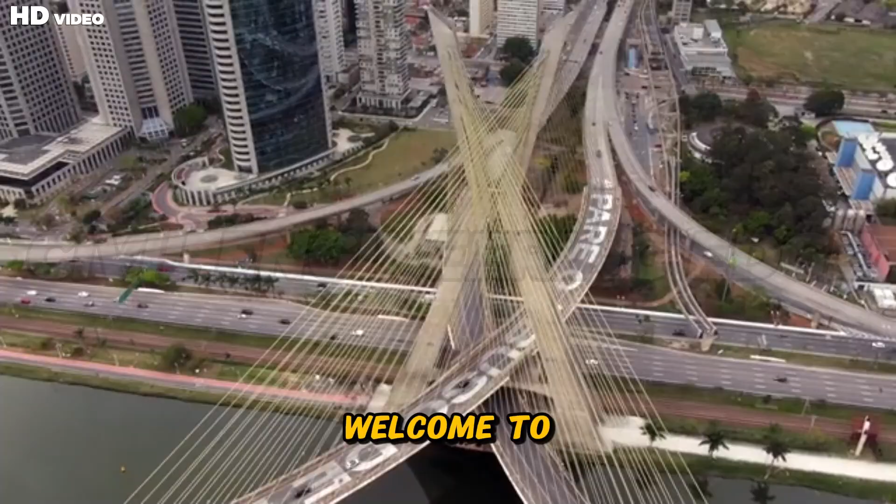In today's video, we're diving into one of the most astonishing possibilities of future urban development: mega underground cities. Imagine entire districts—homes, transport hubs, industries, farms—all built beneath the Earth's surface. Why are engineers exploring downward instead of upward? What technologies make this possible? And could underground cities become humanity's next great frontier? Stay tuned as we break down the engineering, the challenges, the innovations, and the future of living below ground.

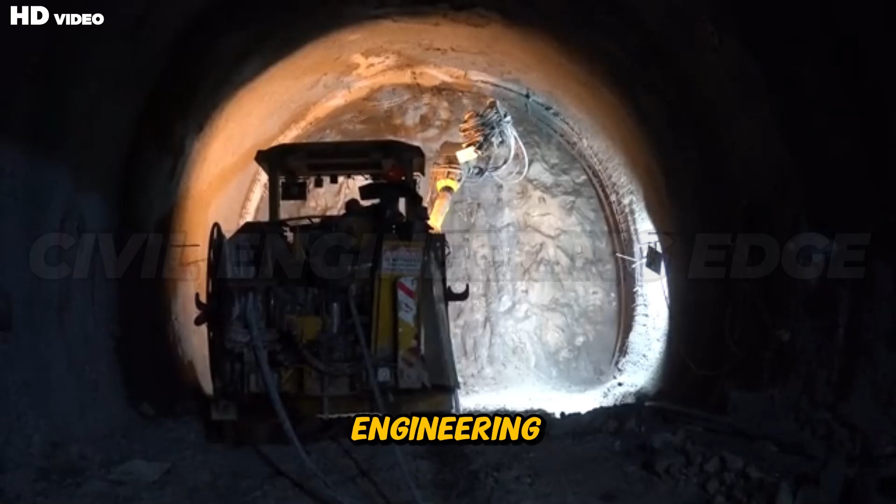Let's begin. Imagine a city, not sprawling across land, but burrowing deep beneath it. What if our future isn't in skyscrapers, but in subterranean megadevelopments? Get ready to dive into the astonishing engineering and surprising technologies making these underworld cities a very real possibility. The intricate planning and construction of massive underground urban developments is explored, along with the surprising technologies and engineering feats required to create subterranean metropolises.

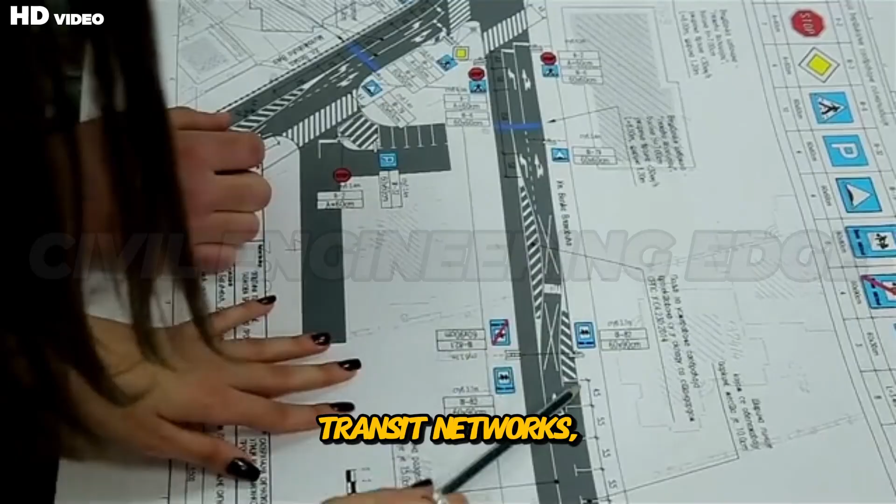The subterranean allure: why go underground? As cities grow denser and land becomes scarce, engineers and planners are forced to rethink the very idea of urban expansion. Instead of competing for limited surface space, visionary thinkers are now looking downward toward the vast, untapped world beneath our feet. The concept of constructing entire districts, transit networks, and public facilities underground isn't just science fiction. It's becoming an urgent solution to modern challenges, from mitigating climate extremes to protecting populations from natural disasters.

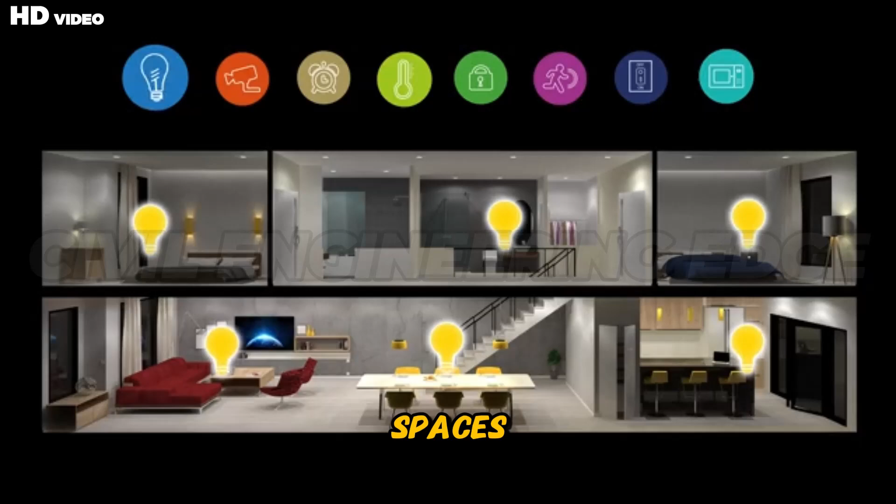Subterranean development offers safety, sustainability, and long-term resilience. Underground spaces have stable temperatures, reduced exposure to environmental hazards, and immense potential for innovative design. With advanced excavation technology and groundbreaking materials, the once impossible idea of underground cities is fast evolving into a practical engineering frontier. This section explores why the future of urban life may not rise into the sky, but instead descend into intelligently designed, climate-shielded environments deep below the surface.

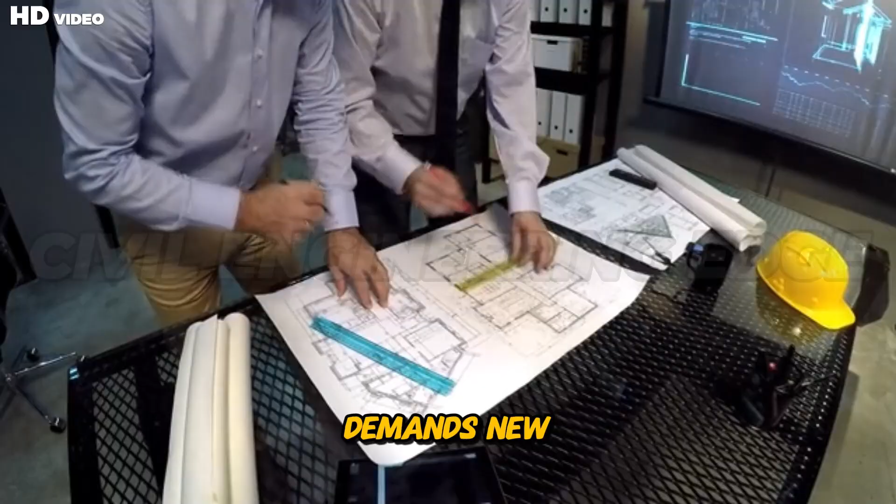The pressing realities of surface overpopulation and extreme climate events are pushing humanity underground. Rapid population growth has pushed major cities into a crisis of space, affordability, and sustainability. Urban areas, especially megacities, are running out of buildable land, forcing millions of people into congested neighborhoods where housing density and infrastructure stress have reached dangerous highs. This growing surface-level pressure demands new solutions, and engineers are increasingly considering the underground realm as a viable alternative. The ground below provides enormous, underutilized volumes that can be transformed into safe, climate-resilient habitats.

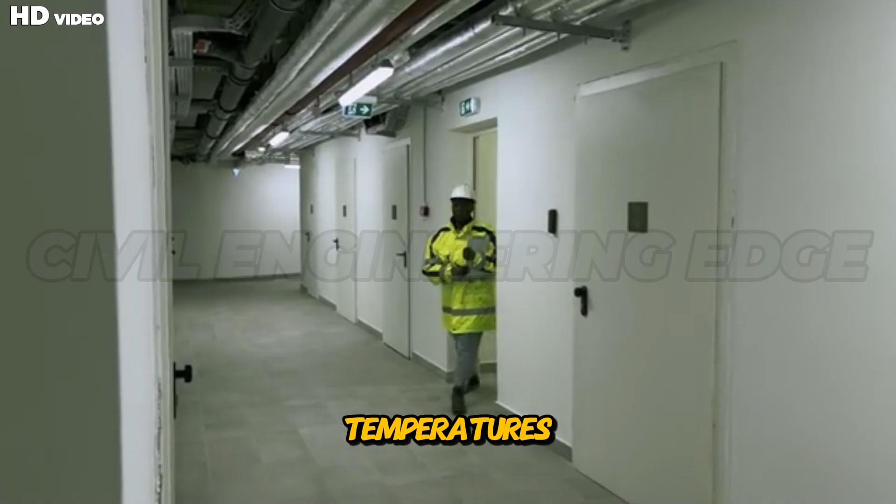In addition to overpopulation, extreme climate events are accelerating the need for such alternatives. Rising temperatures, stronger hurricanes, relentless heat waves, droughts, wildfires, and severe flooding are making many surface environments increasingly hostile. Coastal cities face chronic inundation risks as sea levels rise, while inland cities struggle with heat islands and water scarcity. Underground spaces, naturally insulated from weather fluctuations, offer stable temperatures year-round and protection from storm surges, wildfires, and thermal extremes.

By relocating essential facilities, transit hubs, storage systems, and even residential zones beneath the surface, cities can safeguard populations from environmental instability. Moreover, underground development reduces the pressure on existing land resources, preserving green areas and enabling more sustainable city planning. For nations facing both rapid urbanization and climate threats, subterranean urban expansion represents not just a futuristic concept, but a practical necessity. As climate risks intensify, the underground is becoming humanity's most reliable refuge, a strategic response that combines engineering innovation with climate adaptation to protect future generations.

Historical precedents, from ancient cave dwellings to modern bomb shelters, showcase our primal instinct for subterranean refuge. Humanity's fascination with underground living isn't new. From prehistoric times, people have sought shelter in caves to escape extreme weather, predators, and conflict. These natural formations provided stable temperatures, security, and a sense of protection that open landscapes could not offer.

Ancient underground settlements, such as Derinkuyu in Turkey, a vast multi-level city carved entirely below ground, reveal the remarkable ingenuity of early civilizations. These subterranean labyrinths housed thousands of people, complete with ventilation shafts, storage rooms, water wells, and communal spaces. They served as strategic refuges during invasions and environmental hardships. In China, millions lived in yaodongs, earth-sheltered cave homes valued for their thermal comfort and energy efficiency.

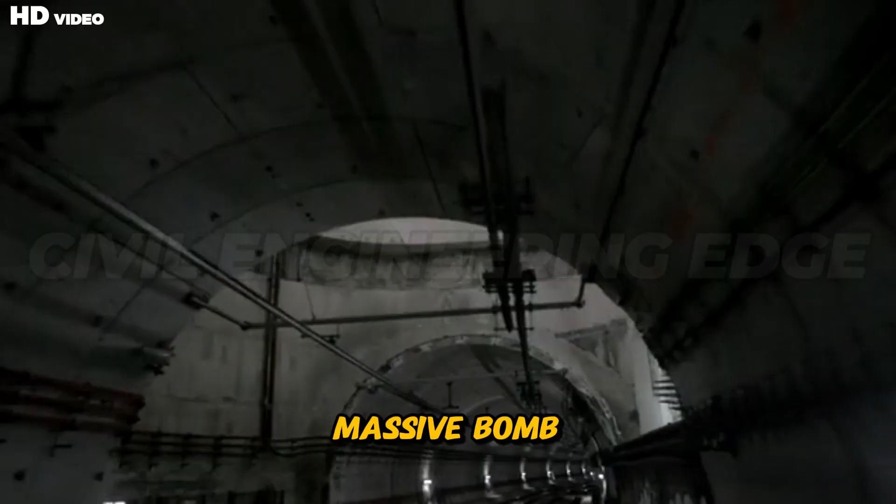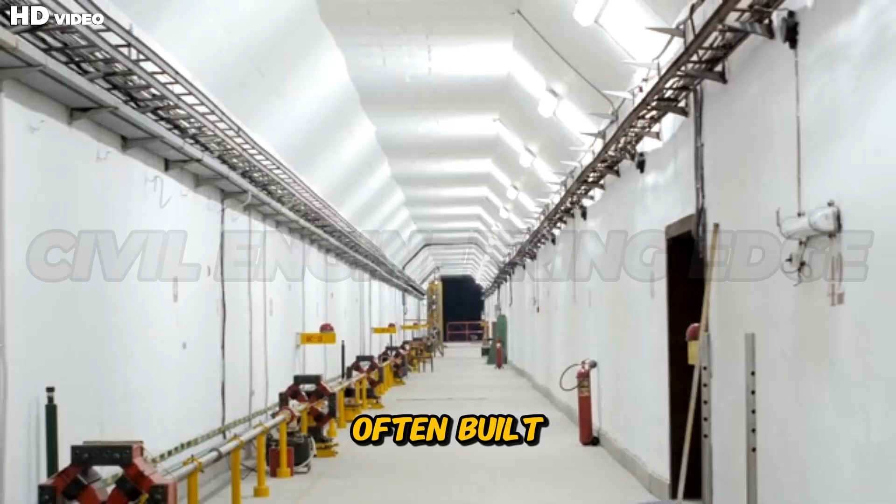Fast forward to the 20th century, and underground spaces took on new significance during wartime. Massive bomb shelters, metro tunnels, and underground bunkers were constructed to protect civilians from aerial attacks. Cities like London, Moscow, and Berlin relied heavily on subterranean networks as safe havens during conflict. Throughout history, this recurring return to the underground reflects a deep-rooted instinct: the need for safety, stability, and survival. Even in modern times, data centers, military bases, research facilities, and archives are often built underground for enhanced security and climate control.

These historical precedents demonstrate that humans have always understood the protective advantages of subterranean environments. Today's push toward underground megacities builds on this ancient legacy, combining timeless principles of refuge with cutting-edge engineering to create sophisticated, resilient urban spaces, teasing the extraordinary benefits and unseen potential of living beneath our feet.

Underground living unlocks a world of possibilities that go far beyond simply creating more space. Beneath the surface lies an environment with unique characteristics that can be engineered into extraordinary advantages for future cities.

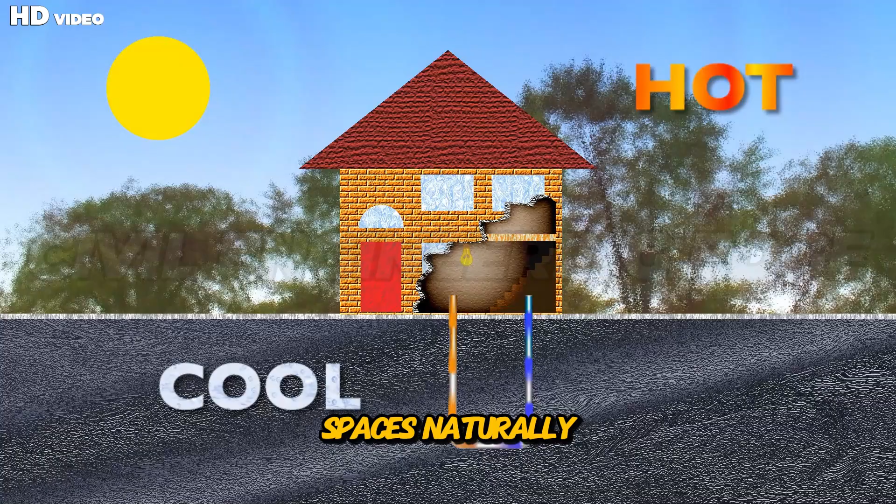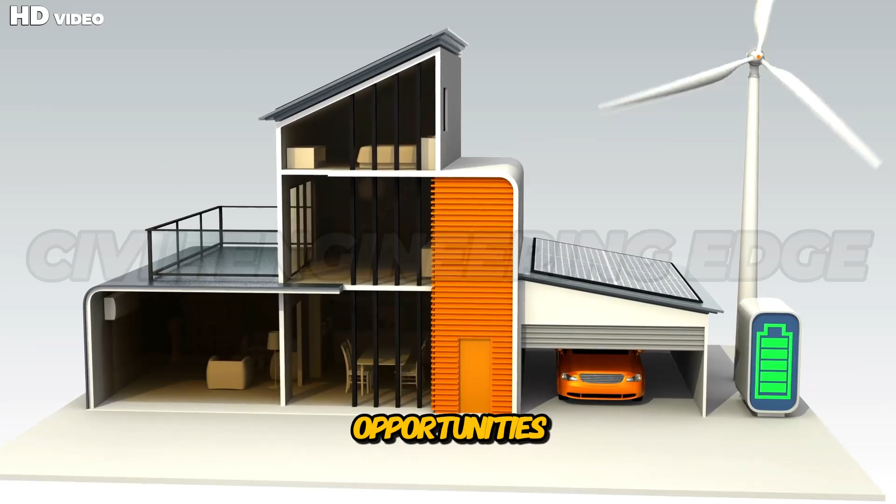Temperature stability is one of the biggest benefits. Underground spaces naturally maintain cooler conditions in summer and warmer conditions in winter, significantly reducing energy consumption for heating and cooling. This creates opportunities for ultra-efficient buildings and eco-friendly infrastructure.

Subterranean cities also shield residents from noise pollution, air pollution, and extreme weather events, offering unparalleled environmental control. Deep below the surface, designers can craft immersive, human-centric environments using smart lighting systems that simulate daylight, natural landscapes, and relaxing ambiences. The underground also presents massive potential for expanding transportation networks without disrupting surface life.

High-speed tunnels, automated logistics corridors, and multi-level transit hubs can operate seamlessly beneath bustling cities. Sustainable resource loops such as underground hydroponic farms, advanced water recycling facilities, and waste-to-energy systems can create self-sustaining ecosystems that operate independently from surface limitations.

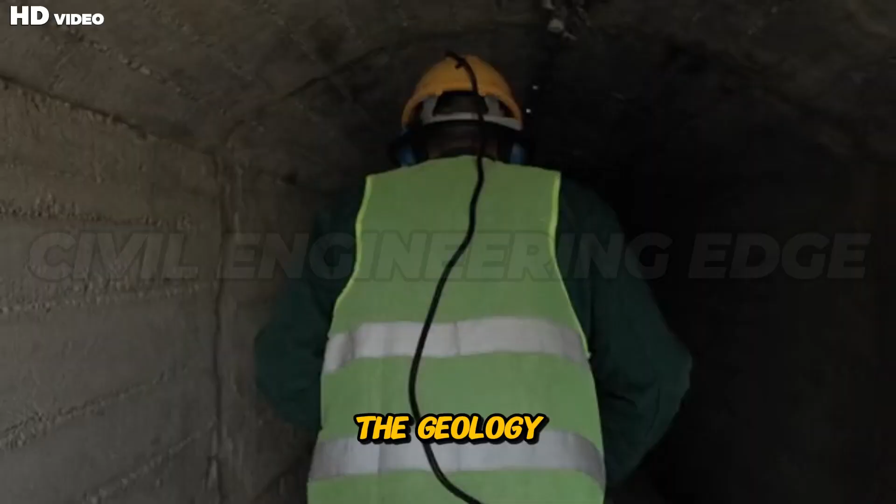The geology of underground spaces also provides exceptional protection for sensitive installations like data centers, laboratories, and emergency shelters. As technology continues to advance, the unseen potential of subterranean development becomes increasingly clear. These environments can become quieter, greener, safer, and more efficient than many surface cities.

The future underground city isn't just a backup plan, it's a bold opportunity to reimagine urban life with innovation, resilience, and sustainability at its core.

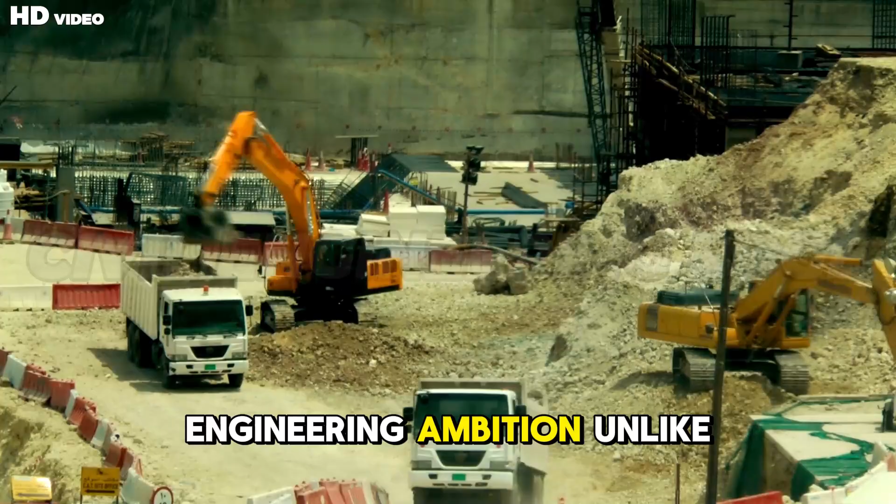Unearthing the impossible, mega engineering challenges. Building massive underground cities is an engineering ambition unlike anything humanity has attempted before. While surface construction deals with open space and accessible terrain, subterranean development demands confronting the Earth itself, creating vast caverns, multi-level transit systems, and habitable districts deep underground requires overcoming extraordinary technical, geological, and human-centered challenges.

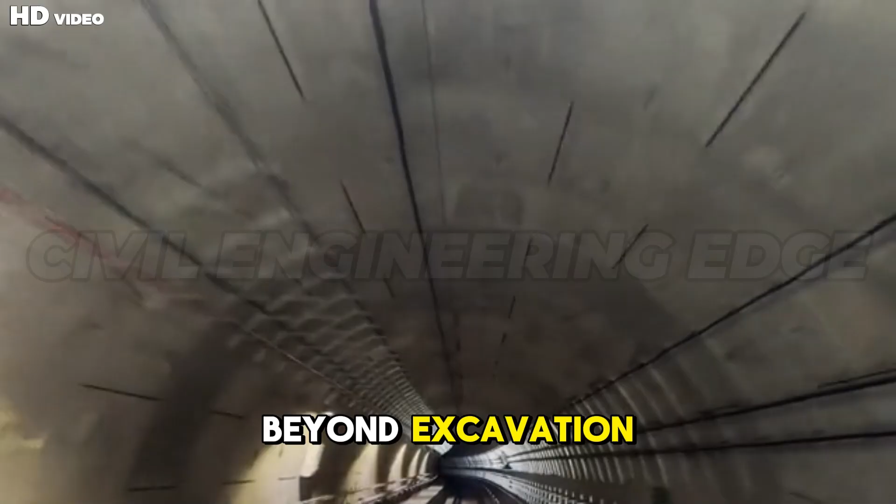Engineers must work with limited visibility, high ground pressure, unpredictable rock formations, and groundwater intrusion, all while ensuring structural safety for thousands of residents. Beyond excavation, designers must account for ventilation, emergency access, fire safety, waste removal, and long-term maintenance in a closed environment. The psychological comfort of people living underground also becomes a critical factor.

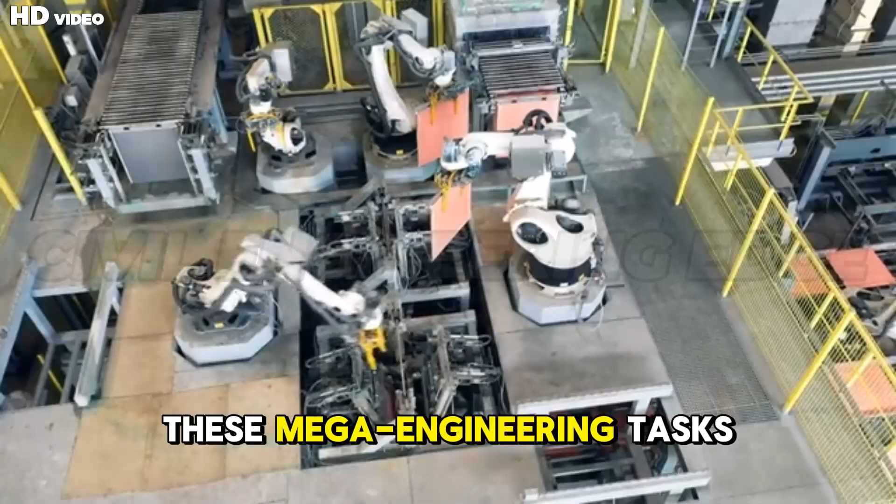These mega-engineering tasks push current technologies to their limit, inspiring new innovations in drilling, reinforcement materials, and automated construction. This section explores the monumental hurdles faced by engineers and the cutting-edge solutions that make these underground dreams plausible.

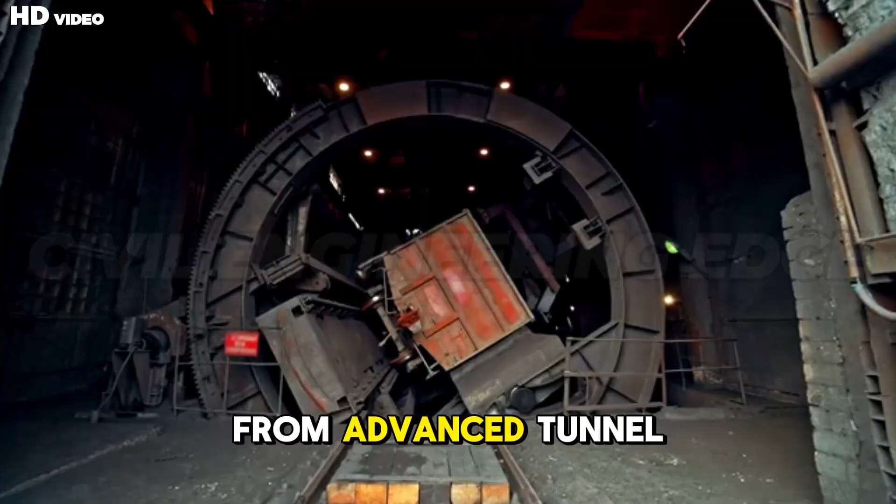The colossal task of excavation. From advanced tunnel boring machines to innovative rock melting technologies, excavating the enormous spaces required for underground cities is one of the most daunting engineering tasks imaginable. Traditional methods like drilling and blasting are too slow, disruptive, and imprecise for creating large, interconnected subterranean districts.

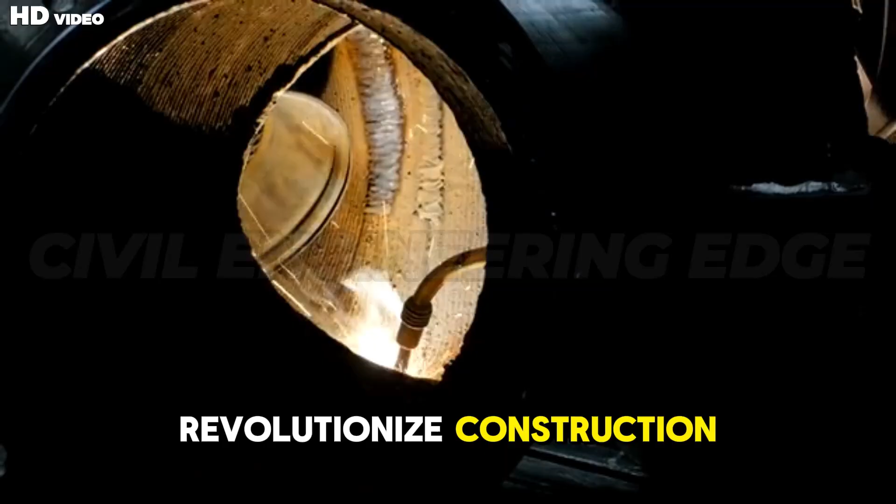This is where modern tunnel boring machines, TBMs, revolutionize construction. These massive mechanical giants, sometimes hundreds of meters long, can cut through rock with remarkable precision, while simultaneously installing tunnel linings to stabilize the excavation. TBMs reduce surface disruption, increase safety, and enable continuous, high-speed tunneling.

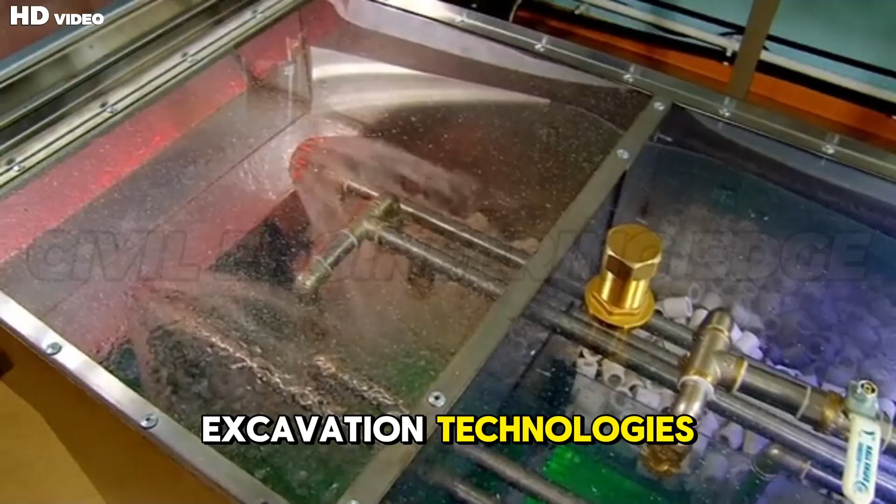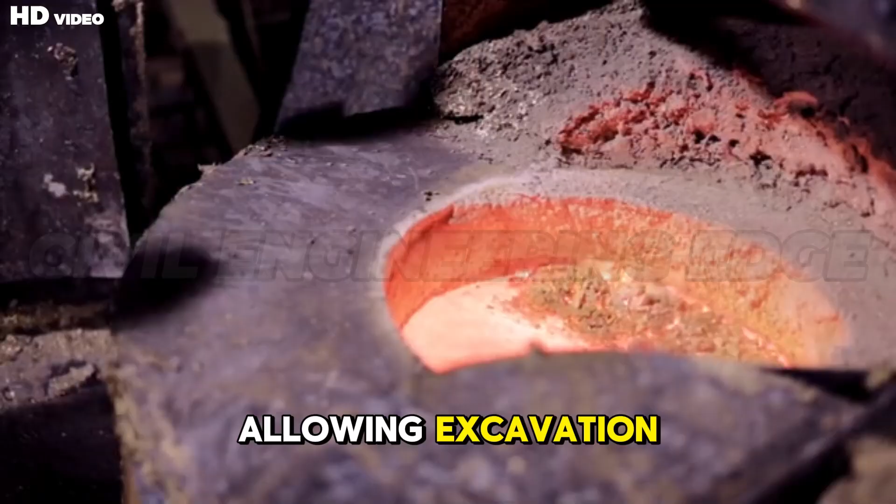However, even TBMs face limitations when dealing with extremely hard rock, mixed ground conditions, or the need for massive cavern formations rather than simple tunnels. To overcome these challenges, researchers are exploring futuristic excavation technologies such as plasma drilling and microwave rock melting systems. These emerging methods aim to soften or liquefy rock using intense heat, allowing excavation without contact-based cutting tools. This could dramatically accelerate construction while minimizing tool wear and geological disturbance.

Other innovations include robotic mining systems, autonomous drilling rigs, and AI-powered geotechnical mapping that predicts rock behavior in real time. Engineers are also experimenting with using controlled chemical expansion agents, 3D rock fracturing patterns, and advanced hydraulic cutters for shaping enormous caverns with high precision.

As underground developments expand in scale, excavation will continue to evolve into a blend of mechanical, thermal, and digital technologies working together. The future of subterranean construction depends on mastering these groundbreaking excavation methods, pushing the boundaries of what is possible beneath the Earth's surface.

Mitigating geological risks, seismic activity, water infiltration, and the stability of massive cavernous structures. Building large-scale underground spaces requires an intimate understanding of geology, since the Earth itself becomes the structural envelope of the city. Geological risks, such as seismic activity, pose significant challenges.

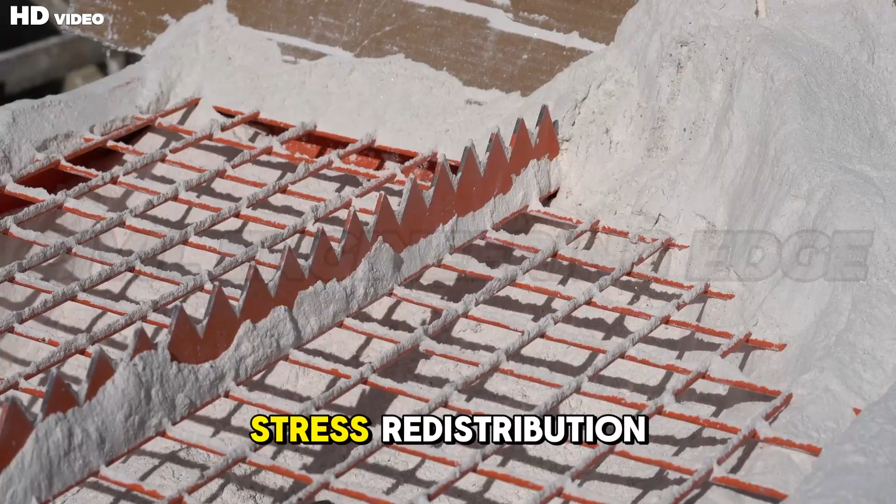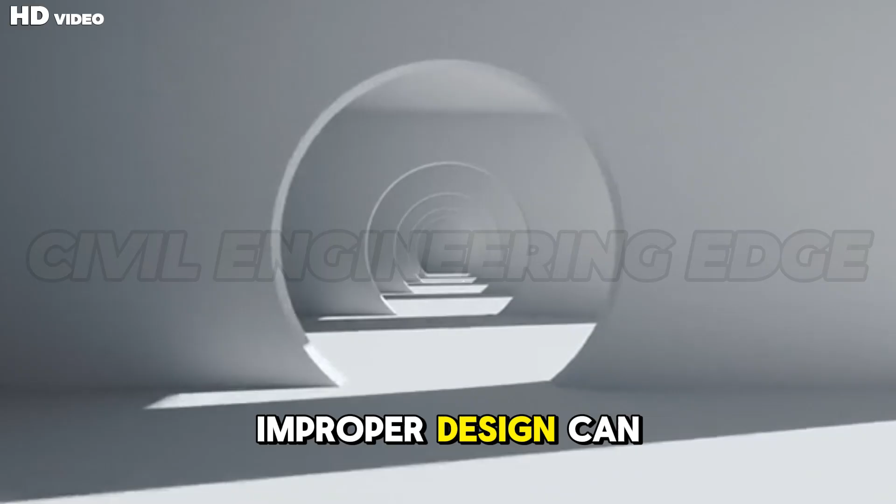Underground structures must be engineered to withstand ground shaking, stress redistribution, and potential rock fracturing. Although underground environments naturally experience lower seismic forces compared to surface buildings, improper design can still lead to collapses or tunnel deformation. Engineers address this by using flexible joint systems, shock-absorbing linings, and real-time monitoring instruments embedded in the rock.

Water infiltration is another major risk. Groundwater can seep into tunnels, increase soil pressure, or cause flooding if not carefully controlled.

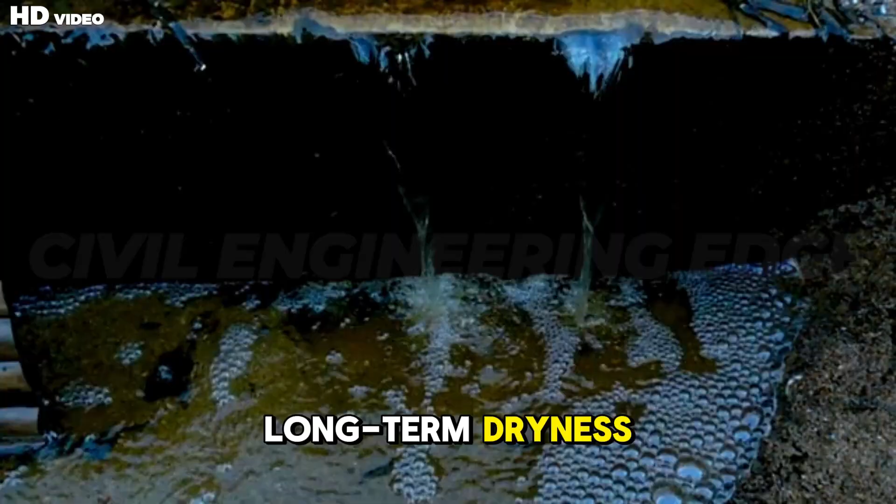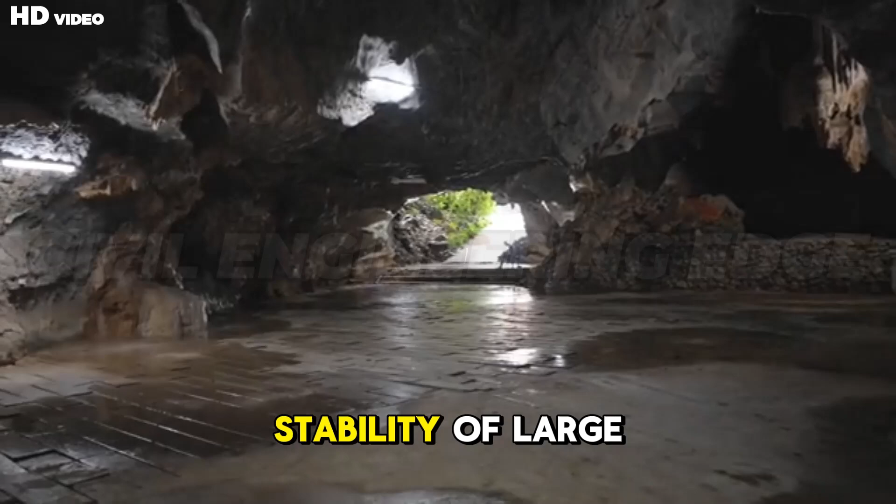Stability of large caverns presents its own set of difficulties. The bigger the open space, the more stress concentrates around its boundaries.

Engineers rely on rock bolts, reinforced linings, steel ribs, and fiber-reinforced shotcrete to maintain structural integrity.

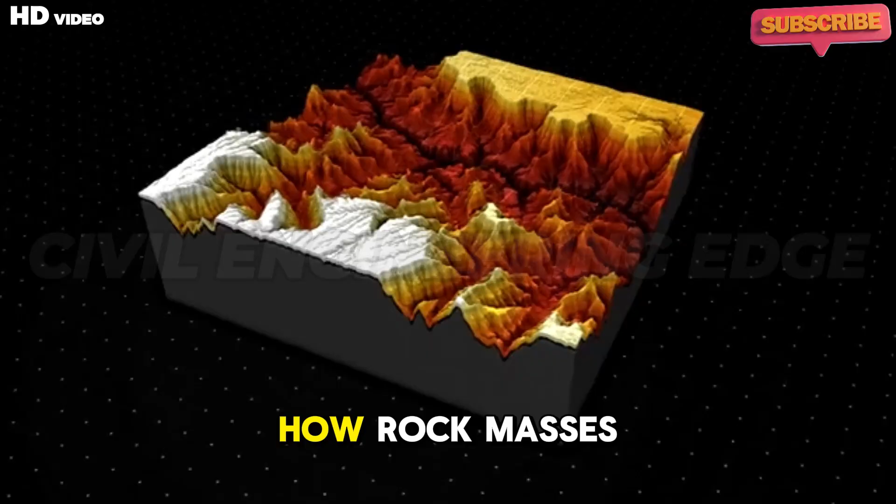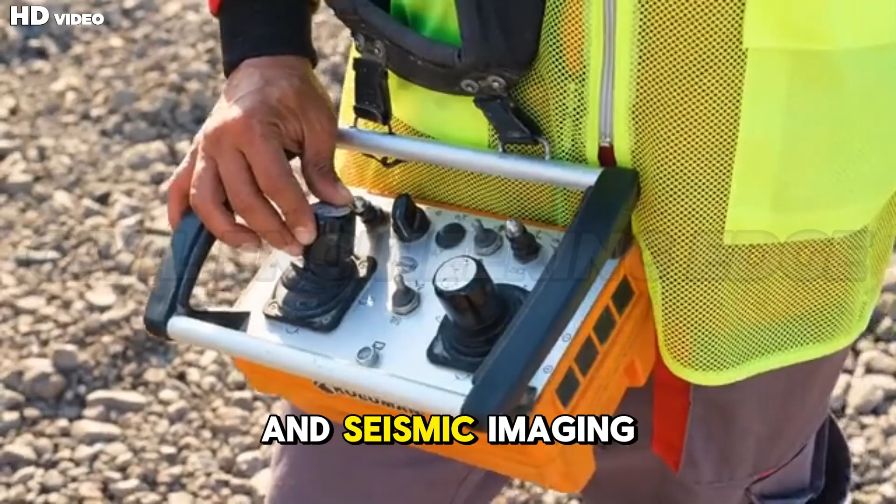Advanced simulations help predict how rock masses will behave when excavated, preventing unexpected collapses. Continuous geotechnical monitoring using sensors, laser scanning, and seismic imaging is crucial for detecting early signs of movement or instability.

Addressing geological risks isn't just a technical necessity—it ensures the safety, longevity, and sustainability of underground developments. These solutions demonstrate how geological science and engineering expertise converge to create stable subterranean megastructures.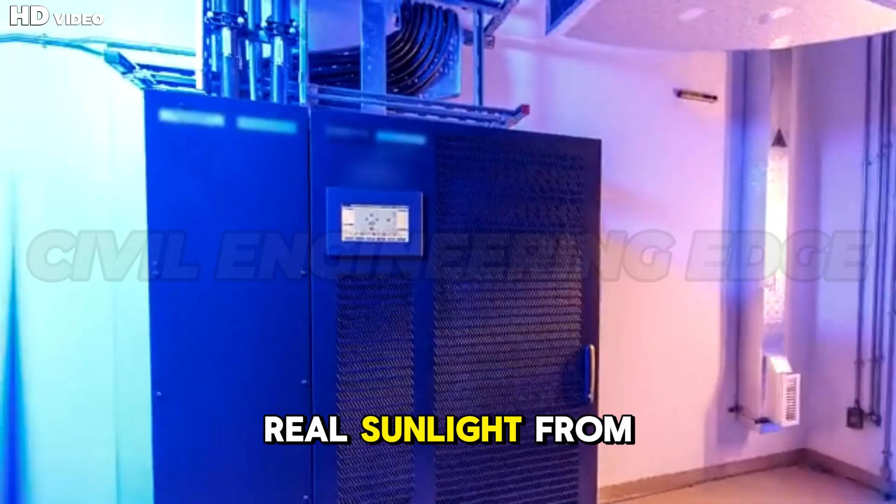and fiber-optic skylights that channel real sunlight from the surface. These artificial skylights can simulate sunrise, sunset, and varying daylight tones to create a more natural ambience.

Claustrophobia is another barrier, especially in enclosed underground environments. To counter this, designers focus on creating spacious interiors with high ceilings, wide corridors, and visually open layouts. Architectural features like mirrored surfaces, curved walls, and panoramic digital screens can create the illusion of expanded space.

Nature integration also plays a crucial role. Indoor gardens, green walls, water features, and biophilic design elements help reduce stress and provide a sense of connection to the natural world. Community spaces, recreational zones, and sensory-friendly lighting further enhance comfort.

Psychological experts are increasingly collaborating with engineers to study behavioral responses to subterranean living. Through thoughtful design, immersive technology, and environmental engineering, the emotional challenges of living underground can be transformed into unique, engaging experiences. With the right innovations, underground cities can feel not only comfortable but deeply inspiring.

Life below the surface: innovating for subterranean cities. Creating livable underground cities goes far beyond excavation and structural engineering. It requires reimagining how humans experience their environment. Life below the surface demands careful innovation in air quality, lighting, food production, waste systems, community design, and psychological comfort.

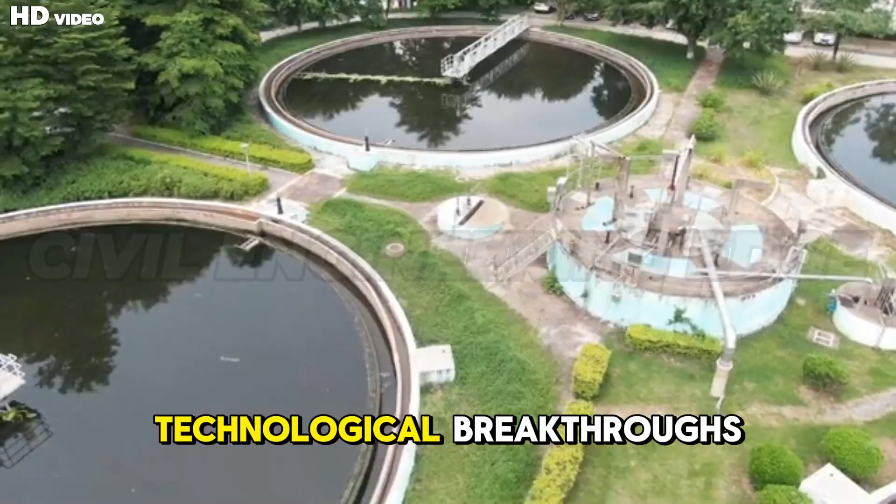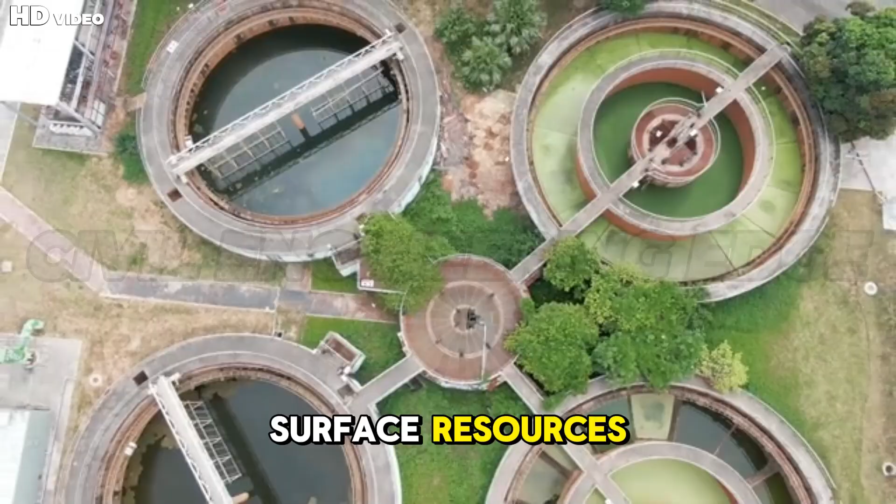Technological breakthroughs in urban farming, recycling, and energy generation allow underground cities to become more self-sustaining, reducing dependence on surface resources. These innovations work together to create communities that are not only functional, but pleasant, healthy, and inspiring.

This section explores the cutting-edge techniques that make deep Earth living possible, transforming underground megastructures into thriving, human-centered habitats equipped to support long-term life. Revolutionizing air circulation and purification to mimic natural environments.

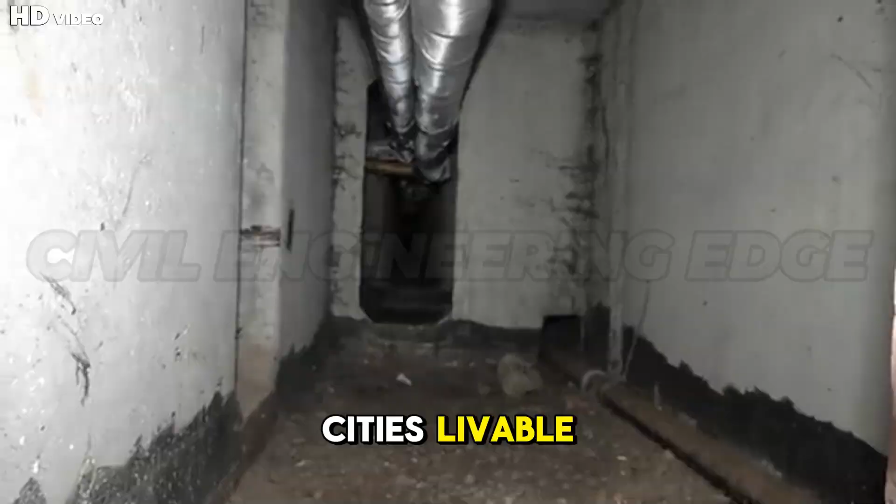Air quality is one of the most critical factors in making underground cities livable. Without natural wind, atmospheric exchange, or exposure to fresh air, engineers must develop systems that reproduce the freshness and purity of outdoor environments.

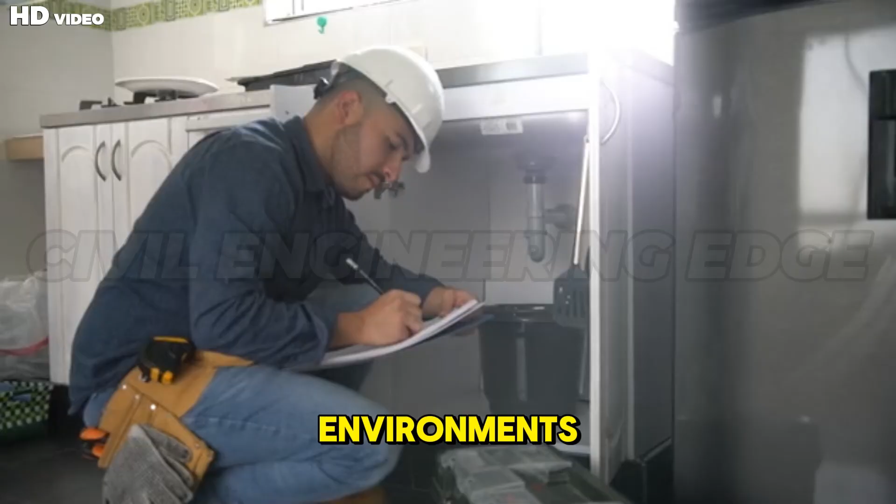Modern subterranean ventilation relies on multi-stage air circulation systems that integrate mechanical ventilation, natural air shafts, and advanced filtration technologies. These systems continuously supply oxygen-rich air while removing carbon dioxide, moisture, and pollutants.

High-efficiency particulate air (HEPA) filters, activated carbon filters, and photocatalytic oxidation units help purify the air by eliminating dust, microbes, chemicals, and odors. To mimic the feeling of natural breezes, some designs incorporate variable airflow patterns and gently fluctuating air speeds, replicating the dynamics of outdoor wind.

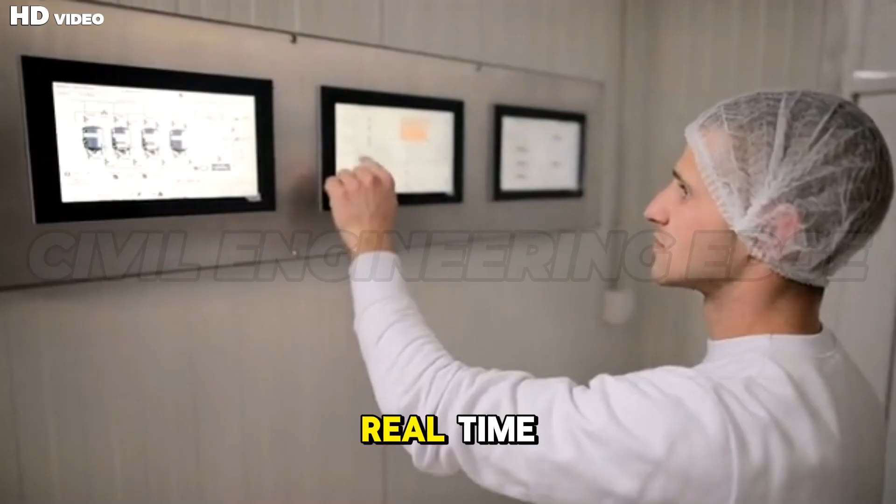Environmental sensors monitor air composition in real time, automatically adjusting ventilation rates to maintain comfort and safety. For deep underground zones, engineers use air pressurization techniques to prevent stale air pockets and promote circulation through long tunnels and large chambers. Additionally, vegetation plays a key role.

Green walls, indoor gardens, and biofiltration systems help absorb carbon dioxide and release oxygen naturally. Innovations such as artificial sky gardens combine plants with controlled sunlight simulation to enhance oxygen production.

Through these advanced technologies, underground spaces can achieve air quality equal to or even better than surface environments. The goal isn't just to supply breathable air, but to create an atmosphere that feels natural, refreshing, and uplifting for those living and working below ground.

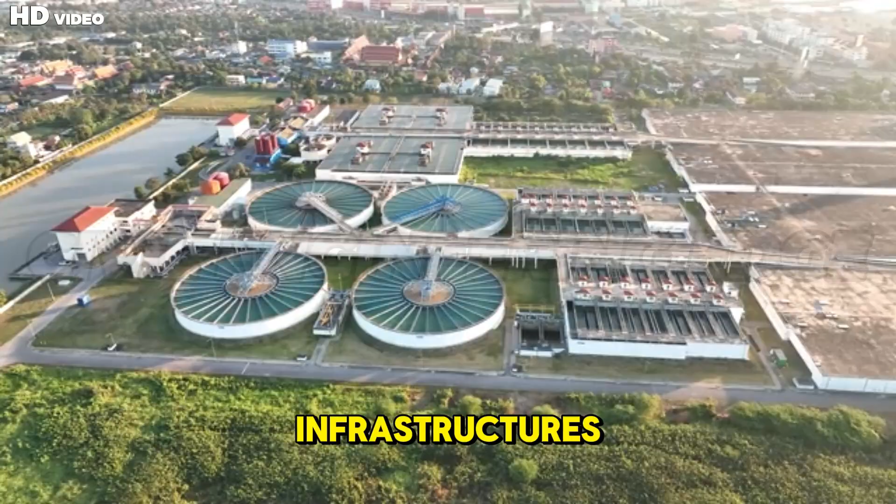Pioneering self-sustaining ecosystems for food production and waste management deep underground. To support long-term habitation, underground cities must incorporate ecosystems capable of producing food and processing waste without relying heavily on surface infrastructures. Advances in vertical farming, hydroponics, aquaponics, and aeroponics are making this possible.

These systems allow crops to grow in stacked layers using nutrient-rich water solutions instead of soil, drastically reducing space and resource consumption. Artificial lighting using full-spectrum LEDs replicates sunlight, enabling year-round crop growth regardless of external weather conditions. Underground farms can cultivate vegetables, fruits, herbs, and even protein sources such as fish or insects through closed-loop aquaculture systems.

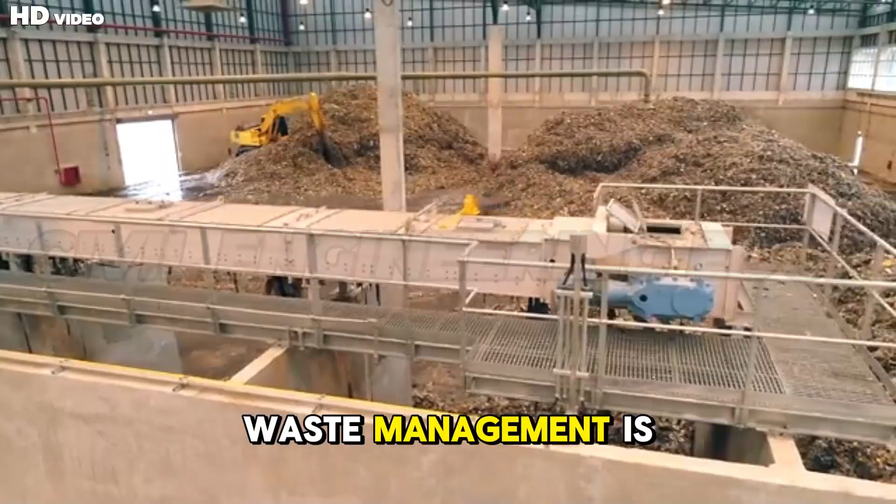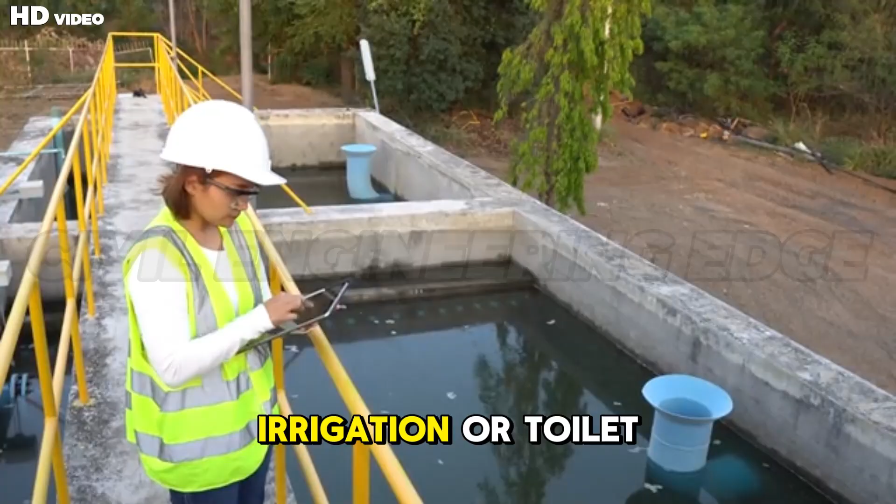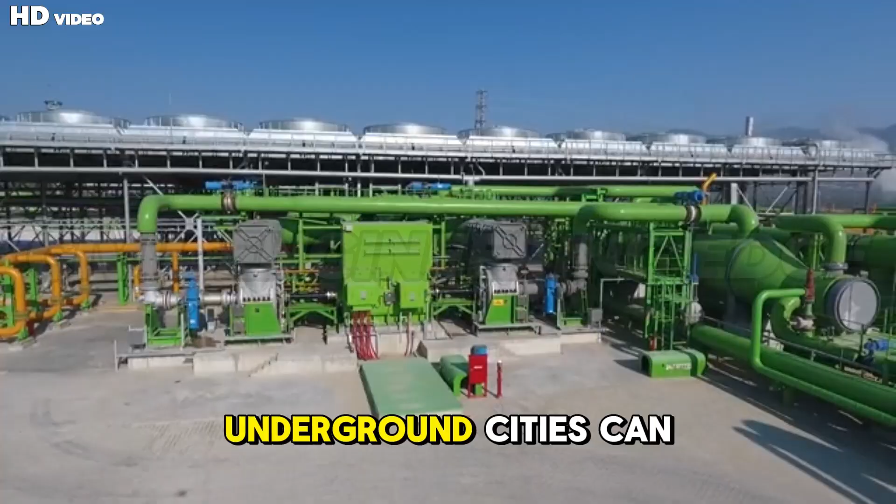Waste management is equally important. Modern underground ecosystems utilize anaerobic digesters, composting reactors, and biogas plants to convert organic waste into useful outputs like fertilizer, methane gas, and nutrient-rich water. Greywater recycling units treat wastewater for reuse in irrigation or toilet flushing, while advanced filtration systems convert black water into clean, reusable water. By integrating waste-to-energy systems, underground cities can generate electricity and heat through biomass conversion processes.

These interconnected systems form circular resource loops where byproducts from one process become inputs for another. The result is an efficient, sustainable ecosystem that minimizes resource dependency and reduces environmental impact. Such innovations allow subterranean settlements to function almost autonomously, enhancing their resilience in the face of climate change, supply chain disruptions, or surface-level disasters. Creating these closed-loop systems is essential for making underground living not just possible, but sustainable on a long-term, city-wide scale.

Designing human-centric spaces, integrating virtual skylights, green walls, and advanced acoustics for comfort. Human comfort is at the heart of successful underground city design. To counter the lack of natural sunlight, engineers incorporate virtual skylights, high-resolution LED panels, or fiber optic systems that replicate real sky views, complete with moving clouds, changing colors, and day-night cycles.

Some systems channel actual sunlight from the surface using mirrors and light tunnels, bringing genuine daylight deep underground. Green walls and indoor landscapes play a major role in enhancing psychological well-being. These planted surfaces purify the air, add natural beauty, and reduce stress by simulating outdoor environments. Large underground atriums, biophilic corridors, and botanical hubs help residents feel connected to nature even without direct access to the surface.

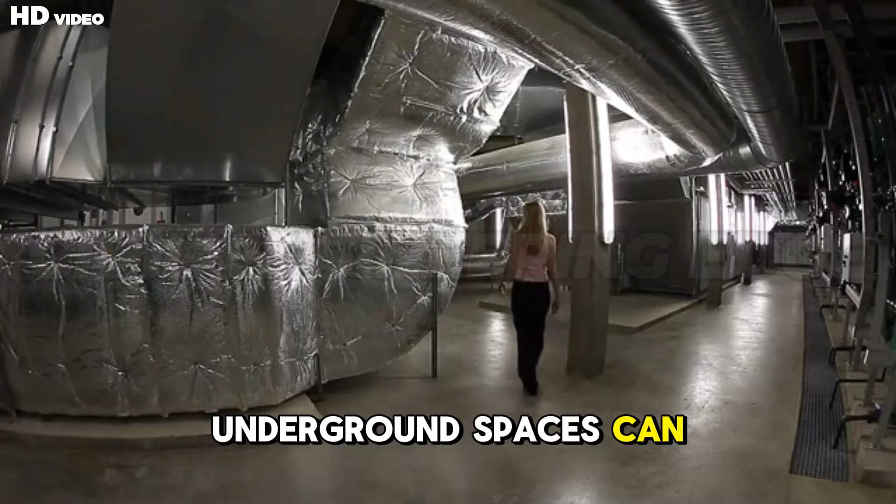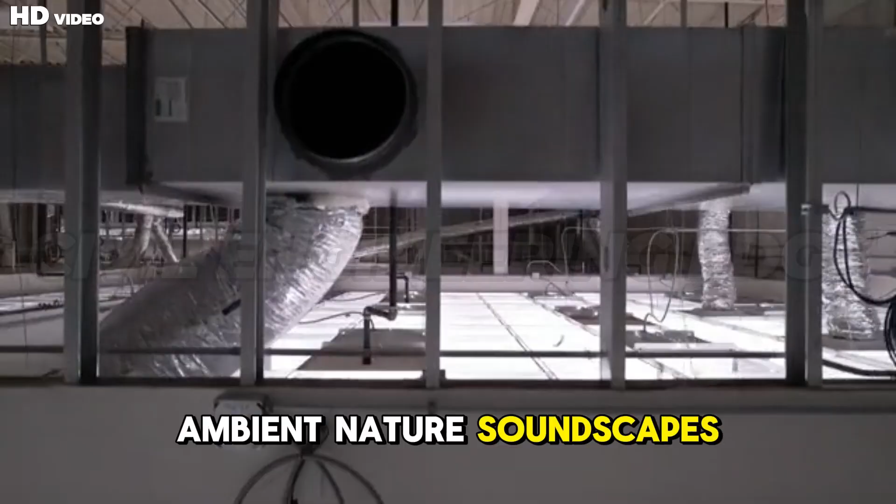Acoustic engineering is another essential element. Underground spaces can easily amplify noise or feel unnaturally silent. To create a comfortable aural environment, architects install sound-absorbing materials, ambient nature soundscapes, and advanced noise control systems. These ensure that living spaces are peaceful, harmonious, and free from echoing or mechanical noise.

Spatial design also emphasizes open, tall ceilings, curved walkways, and multi-level communal areas that prevent feelings of confinement. Interactive digital walls can display natural scenery, city views, or calming environments, creating the illusion of expansive space. Smart lighting adjusts brightness and color temperature to support mood, productivity, and circadian rhythm.

By combining visual, acoustic, and biophilic design elements, underground cities can become vibrant, welcoming environments that feel just as natural as surface dwellings. These innovations ensure that subterranean living remains not only functional but emotionally uplifting.

Beyond the blueprints, real-world underground projects. While futuristic underground megacities may seem like science fiction, the foundations for them are already being built around the world. Many nations are exploring subterranean development to address overcrowding, climate vulnerability, transportation needs, and land scarcity.

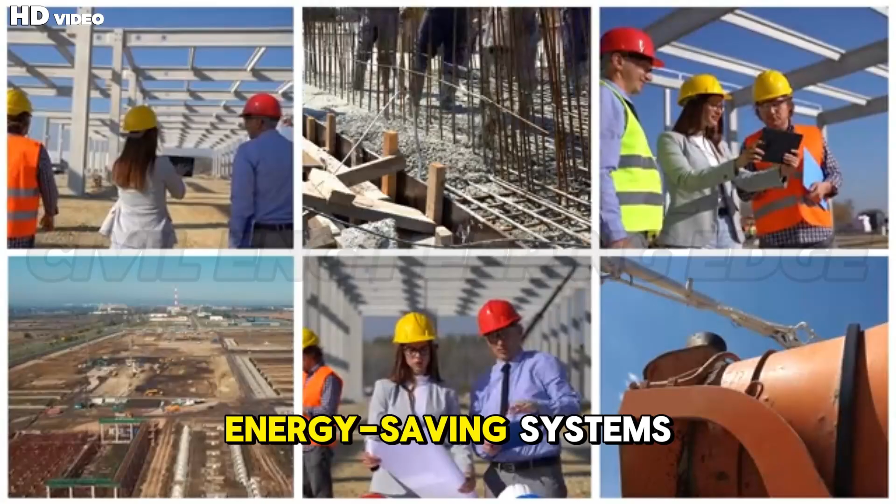Cities such as Singapore, Helsinki, Tokyo, Montreal, and Beijing are investing heavily in underground districts, logistics tunnels, data vaults, shopping complexes, and energy storage systems. These real-world projects showcase how underground infrastructure can operate efficiently while reducing surface congestion and protecting valuable green spaces. They also reveal the level of innovation involved: advanced materials, energy-saving systems, and automated construction technologies.

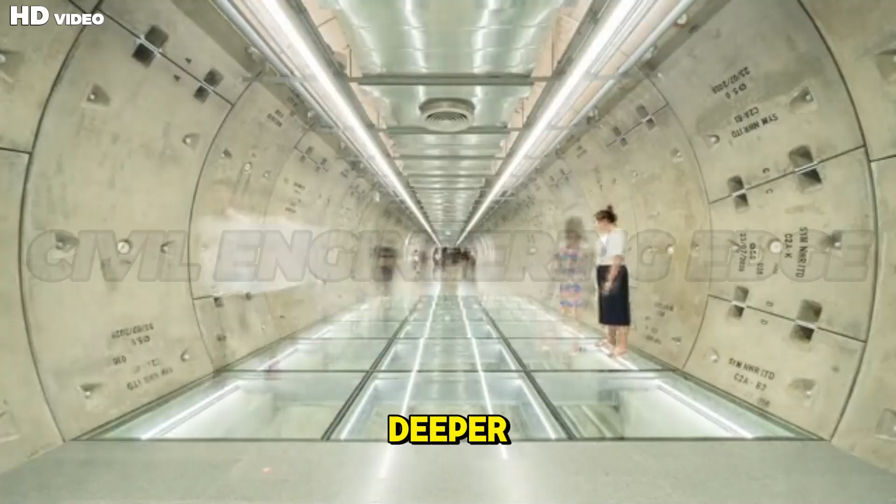The global push toward underground urbanism demonstrates that humanity is already preparing for deeper, larger, and more sophisticated subterranean living. This section highlights the ambitious projects already underway, the technological breakthroughs supporting them, and the economic and societal implications of transforming the space beneath our feet into functional city extensions.

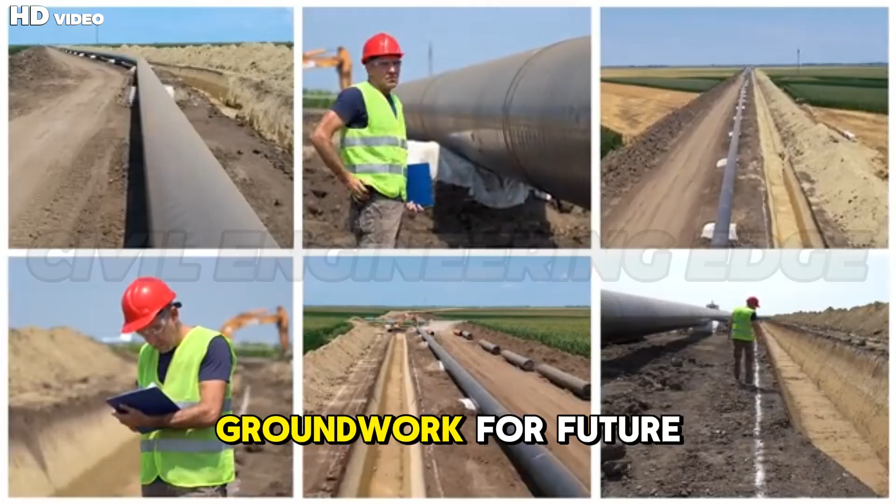Highlighting ambitious, ongoing underground city concepts and early-stage construction initiatives globally. Around the world, several groundbreaking underground projects are laying the groundwork for future subterranean megacities. One of the most notable examples is Helsinki's underground city master plan, which incorporates hundreds of interconnected facilities built within excavated bedrock. This includes shopping areas, sports halls, power plants, data centers, and even emergency shelters, all concealed beneath the surface.

Singapore is another global leader, developing deep underground oil storage caverns, research centers, and plans for underground science parks to save precious land.

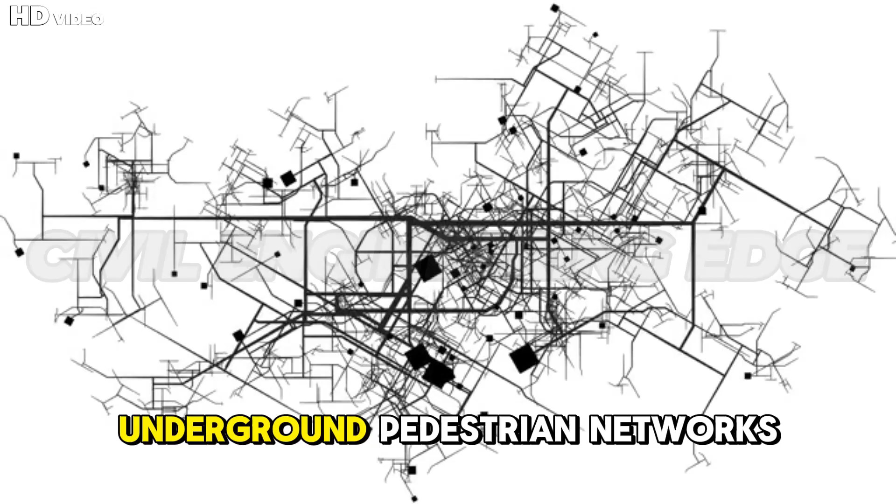Montreal's Réseau, one of the world's largest underground pedestrian networks, stretches for over 30 kilometers, linking shopping centers, offices, and transit hubs, proving that underground mobility can enhance urban efficiency. In China, cities like Chongqing and Beijing are experimenting with multi-level underground complexes that integrate malls, subway systems, and emergency bunkers into dense urban environments.

Japan has been exploring underground floodwater diversion tunnels such as the Metropolitan Area Outer Underground Discharge Channel, showcasing how subterranean engineering can manage extreme climate risks. Meanwhile, Middle Eastern nations have proposed futuristic underground districts designed to combat desert heat and optimize land use.

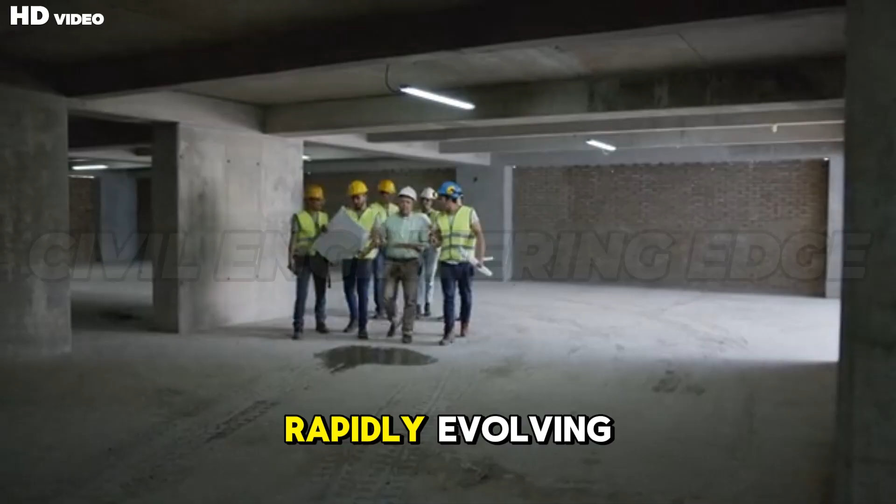These initiatives illustrate that underground development is no longer a theoretical idea but a rapidly evolving engineering frontier. With ongoing research, improved geological surveying, and advanced construction technologies, cities are steadily transitioning toward deeper and more expansive underground infrastructure. These global projects serve as early prototypes for tomorrow's full-scale subterranean cities.

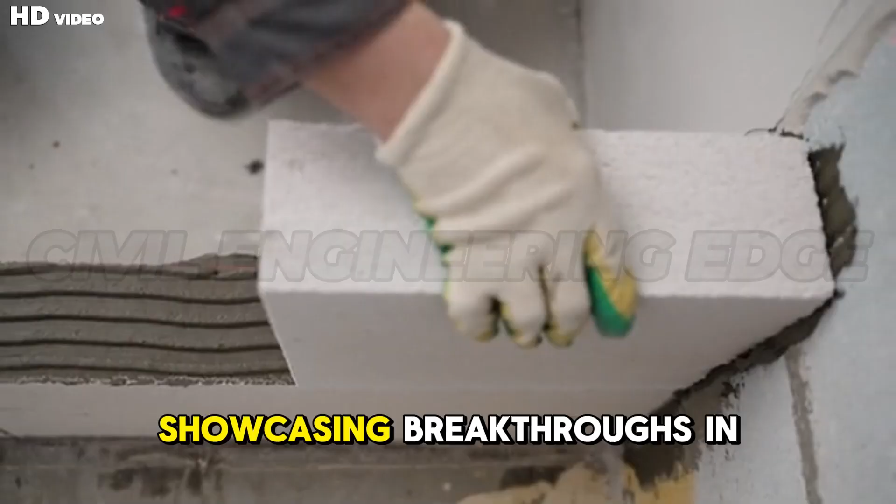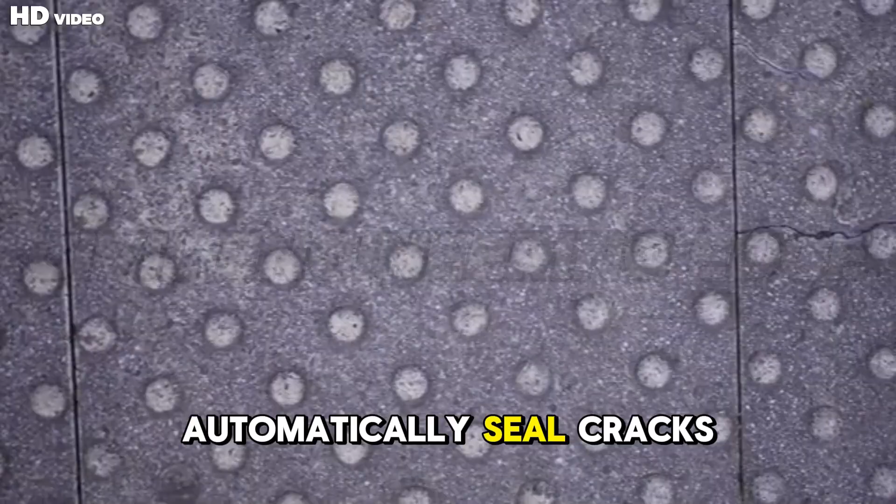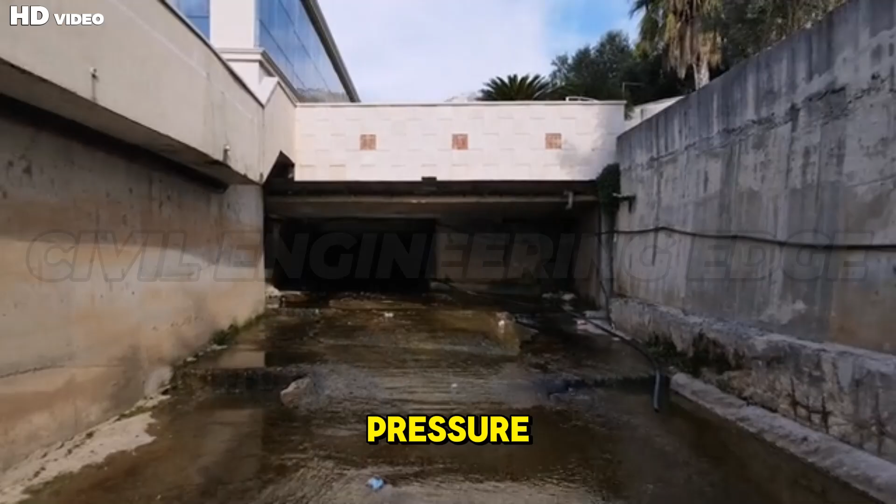Showcasing breakthroughs in material science, self-healing concrete, and transparent aluminium for structural integrity. Material science innovations are essential for building safe, durable, and sustainable underground megastructures. One of the most transformative materials is self-healing concrete, a special composite embedded with bacteria, microcapsules, or mineral agents that automatically seal cracks when exposed to moisture. This significantly increases structural longevity, especially in environments prone to water infiltration or high ground pressure. Self-healing materials reduce maintenance costs and improve safety by preventing minor fractures from expanding into major structural issues.

Another remarkable innovation is transparent aluminium, a ceramic-like material known for its exceptional strength, scratch resistance, and clarity. While still expensive and used primarily for specialized applications, transparent aluminium could eventually serve as protective windows, observation panels, or light tunnels in underground spaces. Its ability to withstand extreme pressure makes it ideal for deep earth environments.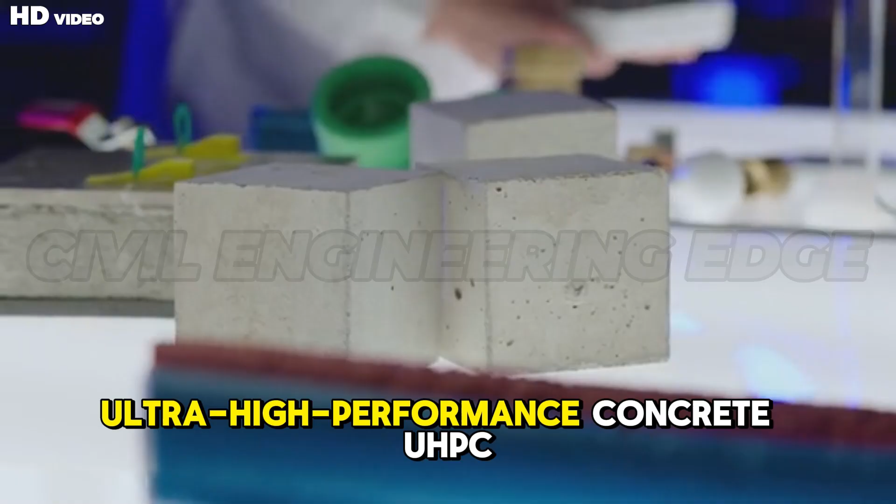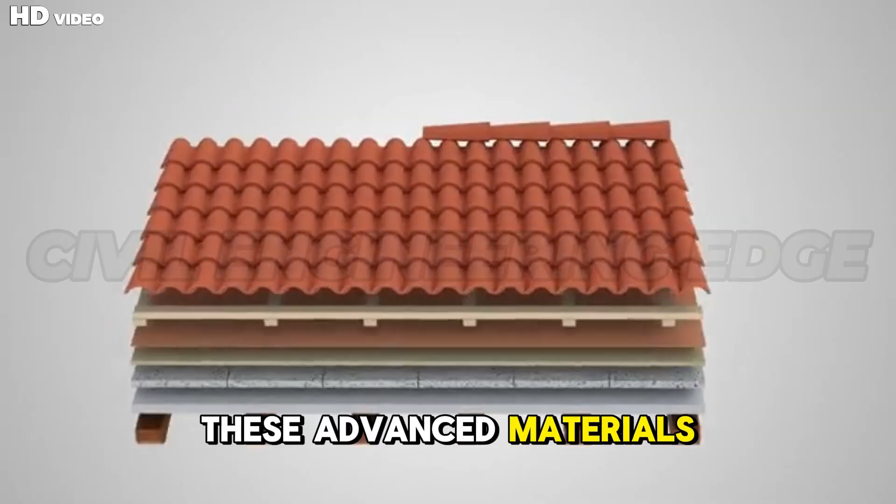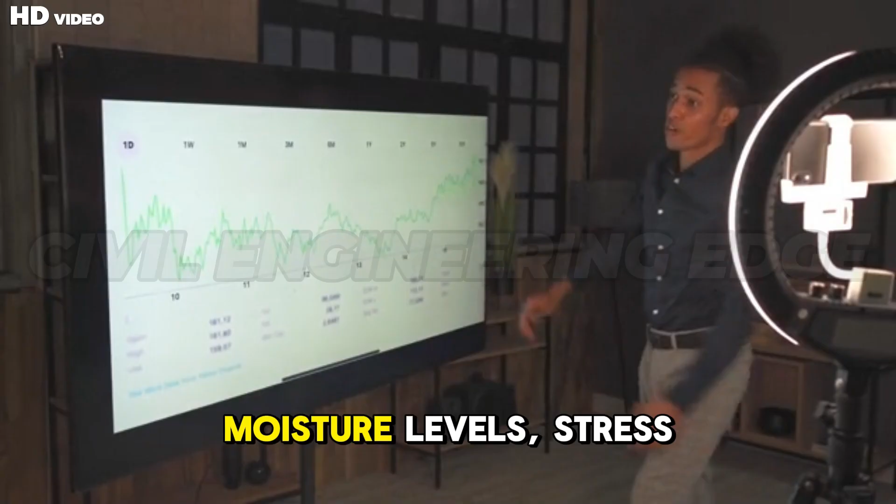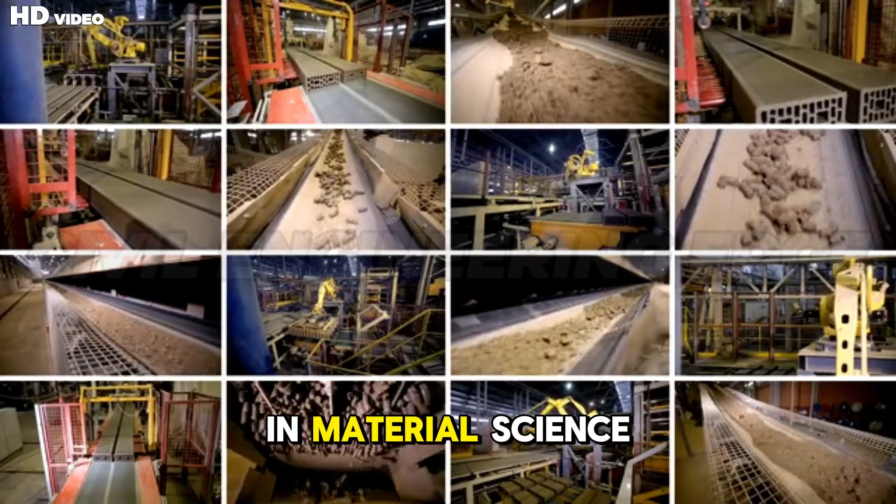Engineers are also experimenting with fiber-reinforced polymers, ultra-high-performance concrete (UHPC), and graphene-enhanced materials to increase the structural resilience of underground chambers. These advanced materials offer superior durability, reduced thickness requirements, and greater resistance to corrosion and chemical attacks. Additionally, new waterproofing membranes, thermal-resistant coatings, and smart structural sensors are transforming the way underground environments are maintained. Embedded sensors can continuously monitor temperature, moisture levels, stress distribution, and crack formation, sending real-time data to engineers for proactive repairs. Together, these breakthroughs in materials science are redefining the safety and longevity of subterranean construction. They enable larger caverns, deeper structures, and innovative architectures that were previously impossible.

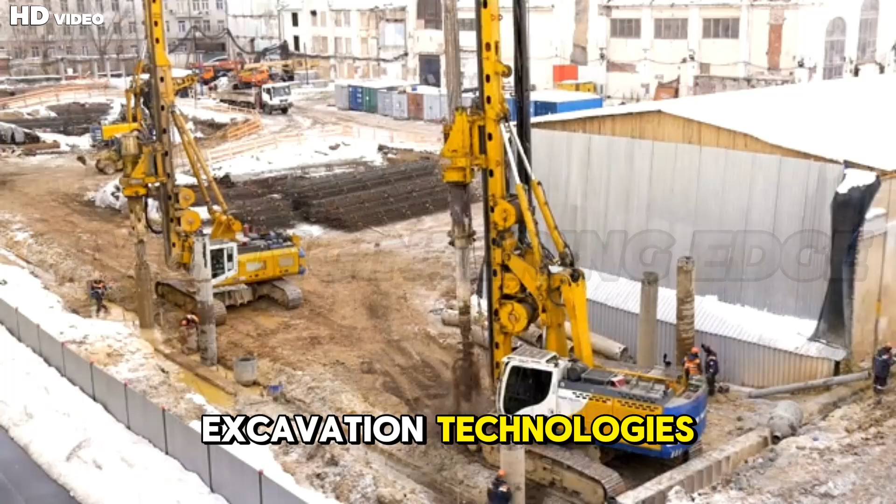The economic and societal impact of developing these monumental underground havens. The economic and societal implications of underground megacities are profound. On the economic side, developing underground spaces opens vast new real estate opportunities without expanding urban footprints. This can dramatically reduce land acquisition costs, protect natural landscapes, and promote sustainable urban growth. Major industries—transportation, logistics, data storage, energy, and retail—stand to benefit from climate-protected, secure underground environments that minimize disruptions from extreme weather.

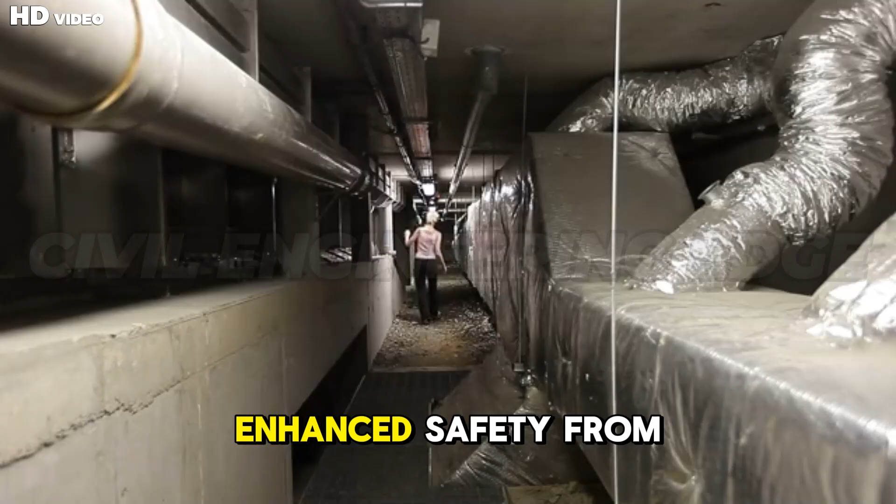Construction sectors will also see growth due to demand for advanced excavation technologies, high-performance materials, and long-term maintenance systems. Societally, underground developments can reshape how cities function. By relocating heavy traffic corridors, industrial facilities, or utility networks below ground, surface areas can be repurposed into parks, pedestrian zones, and green public spaces, improving urban quality of life. Subterranean spaces offer enhanced safety from natural disasters, providing secure shelters during storms, heat waves, or conflicts. They can also support population growth without overcrowding surface infrastructure.

However, the shift underground also raises questions about accessibility, affordability, and long-term social integration. Ensuring that subterranean spaces are welcoming, psychologically comfortable, and equitably accessible is essential to avoid socioeconomic divides. With thoughtful planning, underground cities can become inclusive hubs that combine economic resilience with environmental sustainability. Ultimately, these developments have the potential to transform metropolitan living, setting new standards for safety, efficiency, and sustainability.

The future is down, a look ahead. As cities around the world confront rising populations, climate change, and land scarcity, underground urbanism is emerging as a promising frontier for future development. The technologies and engineering breakthroughs being developed today hint at a future where subterranean cities are not just supplementary infrastructure, but full-fledged urban environments.

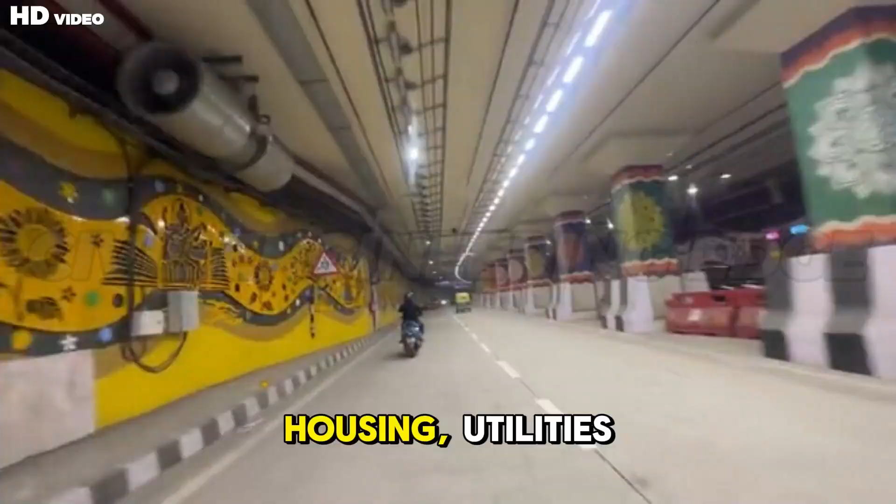By 2050, underground districts may integrate transportation, agriculture, housing, utilities, and recreation into deeply layered, self-sustaining ecosystems. Advanced automation, renewable energy systems, and intelligent monitoring networks will ensure these underground megastructures operate efficiently and safely. The future of subterranean living will depend not only on engineering, but also on ethical planning, inclusive policies, and sustainable governance. This section explores how underground cities might evolve over the next few decades, what innovations will shape them, and

Speculating on the next generation of underground urban planning and what a truly self-sufficient subterranean city might look like by 2050.

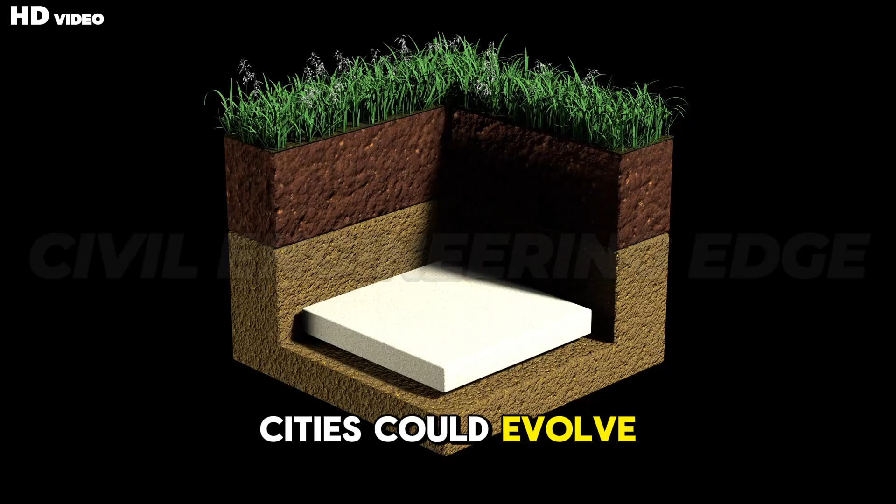By 2050, underground cities could evolve into highly integrated, multi-layered environments designed to function with minimal dependence on the surface world. Future underground planning will revolve around complete self-sufficiency, producing food, recycling water, generating energy, and supporting healthy communities entirely below ground. Underground megastructures may be built in vertical layers, with transportation tunnels forming the upper levels, residential and commercial districts in the mid-layers, and deep utility networks, farms, and data hubs occupying the lowest levels.

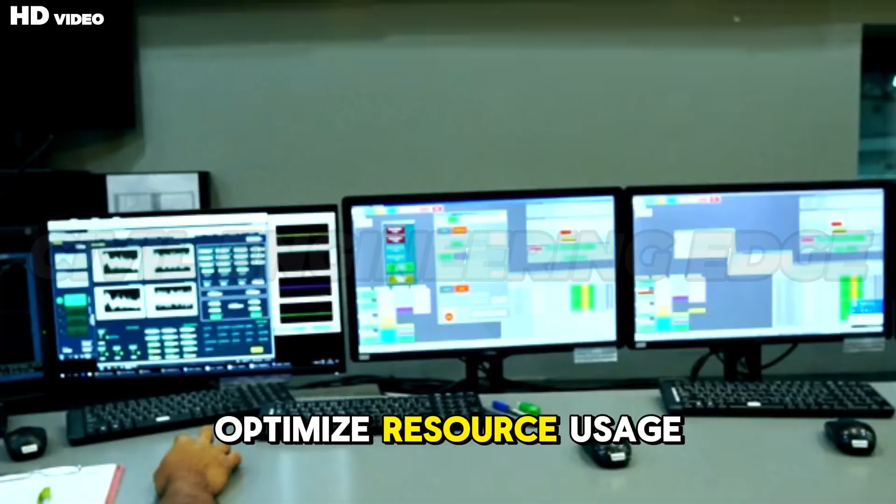Smart infrastructure will use AI-driven monitoring systems to continuously assess structural stability, optimize resource usage, and manage environmental conditions across vast underground territories. Renewable energy sources like geothermal power, underground solar collectors, and waste-to-energy reactors will help maintain energy autonomy. Urban farms using next-generation hydroponics and bioreactors may produce everything from vegetables to cultured proteins, ensuring year-round food supply.

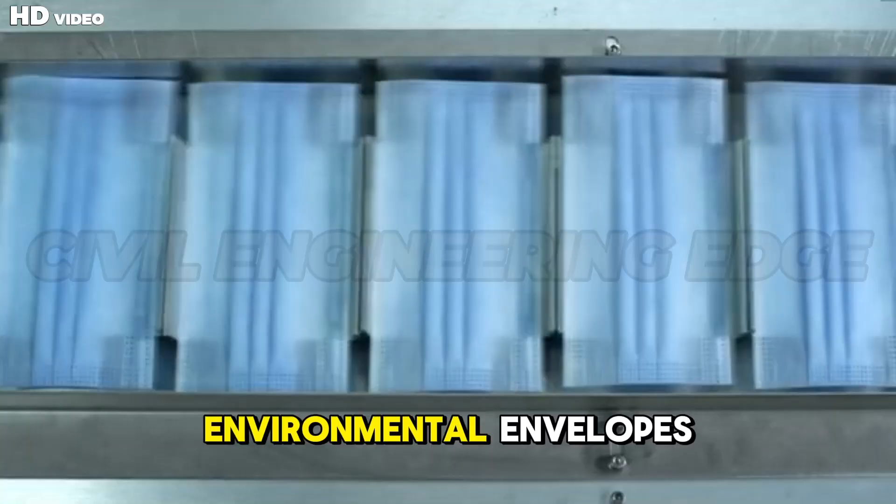Autonomous vehicles and magnetic levitation pods will transport people efficiently through underground corridors. Public spaces will be enriched with digital parks, simulated natural environments, and immersive lighting that shifts with virtual weather patterns. Environmental envelopes will maintain ideal air quality, humidity, and temperature using self-regulating ventilation systems.

Future underground cities will prioritize sustainability, circular resource cycles, and human-centered design to create communities that feel natural and comfortable. By mid-century, subterranean cities may become a crucial component of global urban resilience, offering secure, climate-proof environments capable of supporting millions, addressing the ethical considerations and global governance required for these massive infrastructure projects.

The rise of underground megacities introduces complex ethical and governance challenges that must be addressed to ensure equitable and responsible development. One of the primary concerns is accessibility. Without proper regulation, underground infrastructures could become exclusive zones benefiting only wealthy populations or privately owned enterprises. Governments must ensure that subterranean spaces remain public assets, designed for inclusive access and affordable living.

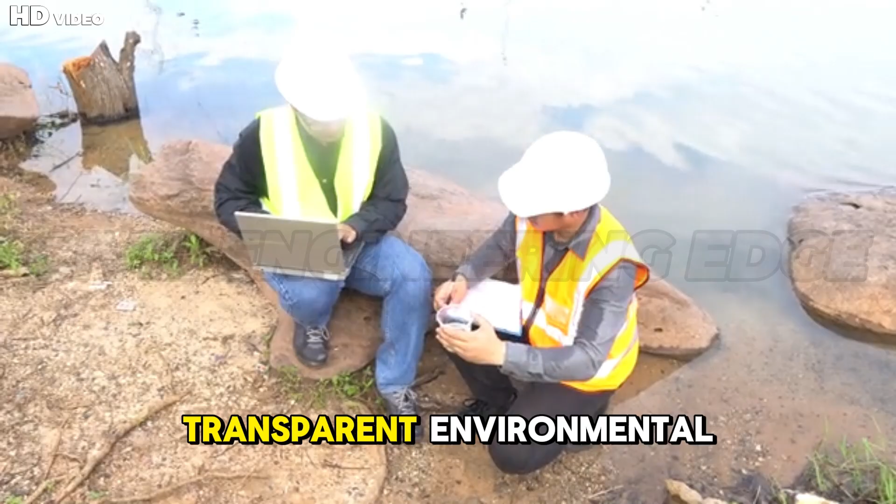Environmental justice is another critical issue. Excavation on such massive scales can impact groundwater flow, ecosystems, and geological stability. Transparent environmental assessments and strict monitoring must guide all stages of development. Global governance frameworks may be needed to regulate deep earth construction, similar to policies that govern international waters or outer space.

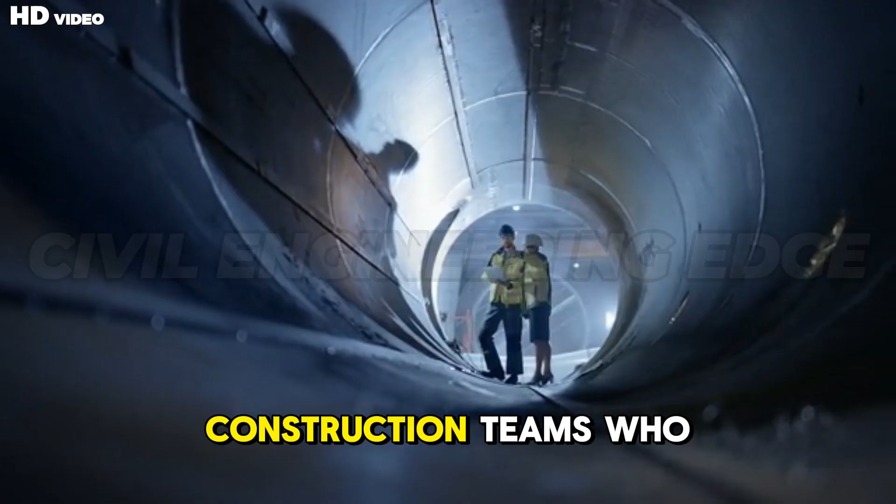Ethical considerations also include labor rights, ensuring safe working conditions for construction teams who operate in hazardous underground environments. Privacy concerns may arise from the extensive sensor networks required to monitor air quality, structural integrity, and population movement. Clear guidelines must define how data is collected, stored, and protected.

Social cohesion is equally important. Planners must avoid creating isolated underground societies disconnected from surface communities. Cultural needs, mental health support, and community-centered public spaces must be integral to planning. Ultimately, ethical governance ensures that underground cities evolve not as dystopian refuges, but as sustainable, inclusive environments guided by transparency, fairness, and responsibility.

A final call to consider the incredible ingenuity and resilience of humanity in facing future challenges. Humanity has always adapted to challenges with innovation, creativity, and determination. As climate pressures intensify and urban populations surge, underground cities represent the next chapter in our long history of engineering resilience.

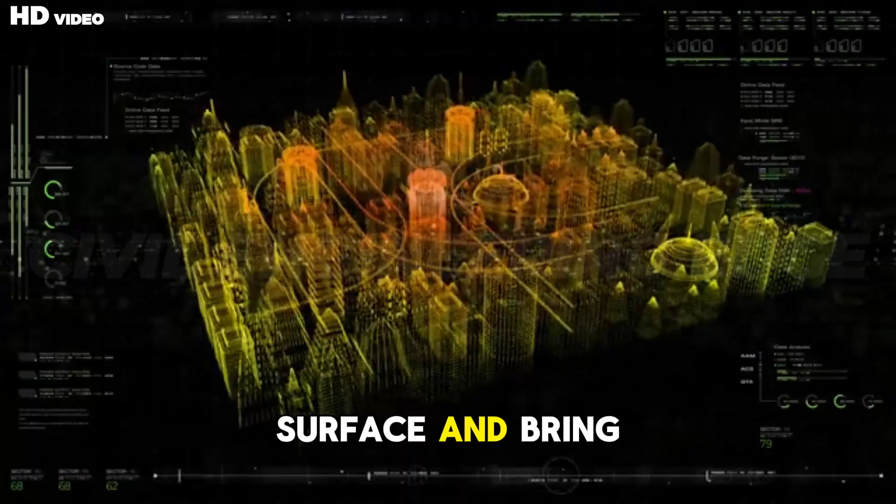From carving early cave shelters to constructing modern metro systems and data vaults, we have continually transformed the Earth to meet our needs. The vision of vast subterranean cities symbolizes not just technological advancement, but human adaptability, our ability to imagine possibilities beneath the surface and bring them to life through science and engineering.

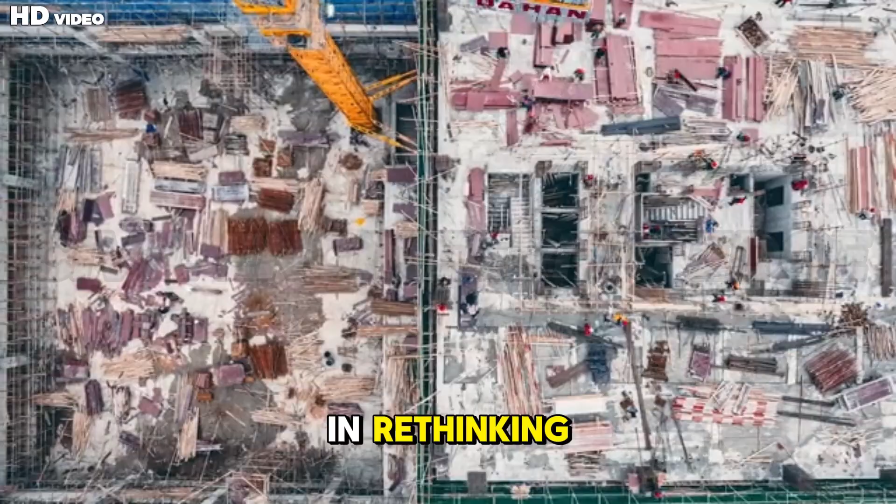These underground environments remind us that solutions to the world's most pressing challenges often lie in rethinking how we use space, resources, and technology. As we envision homes, farms, transit systems, and green corridors deep underground, we are also redefining the future of civilization itself.

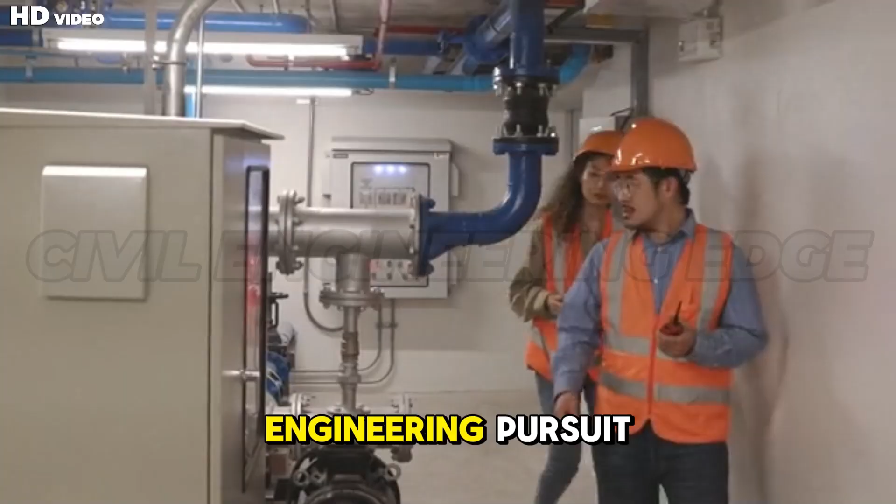The courage to explore unfamiliar frontiers, whether in outer space or beneath the Earth, reflects humanity's unbreakable spirit. The journey towards subterranean megacities is more than an engineering pursuit. It is a testament to our collective resilience in the face of environmental uncertainty, urban pressures, and global transformation.

As we move forward, embracing innovation with responsibility, we must celebrate the teams of engineers, planners, architects, scientists, and visionaries working to design a safer, smarter, and more sustainable future. Below the surface lies not darkness, but opportunity, progress, and the next great chapter in human ingenuity.